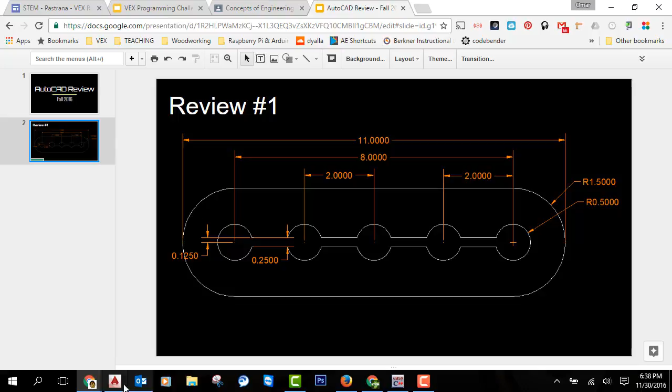One of the things we've got to remember to do is make sure all of these are turned off except for our polar snap, our polar tracking. So we click on that arrow and make sure we've got 15, 30, 45, 60. And then here we have endpoint, midpoint, center, quadrant, intersection. Those are the only ones we have checked on.

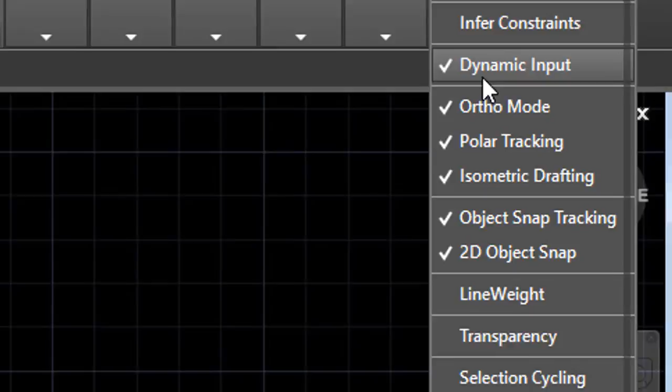If you've got something weird coming on, you've probably got what's called dynamic input. If you click on that, you'll see this one right here, and this is going to be the one you'll probably have, so just make sure that's turned off. Everything else we've got turned off except for those 3, and I just leave that one on.

So I'm going to go ahead and start drawing. When I approach this drawing, I'm thinking of drawing the outside first, and then I'm going to do the inside. So I'm going to go ahead and click circle, click that starting point, and that radius is 1.5.

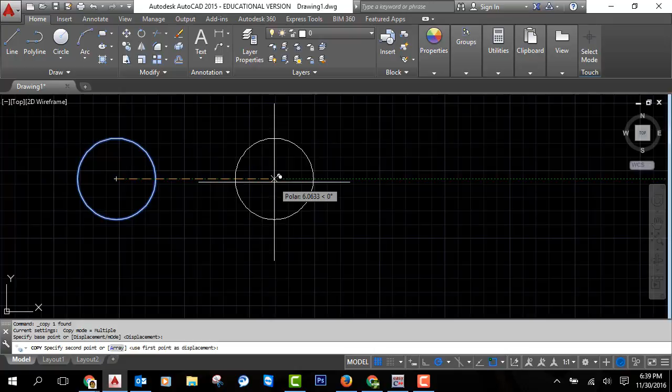So I've made this one, and then I'm going to take this one and copy it. Starting from the center, I'm going to go over to the side, and it says from center to center is 8 inches, so I'm just going to type in 8. And there it is, so now I've got that.

I'm going to make lines, and because I have snap on, I can go quadrant to quadrant, and quadrant to quadrant. And then I do trim - remember trim, I'm going to go ahead and press enter, and then I delete those. And now I have that outside.

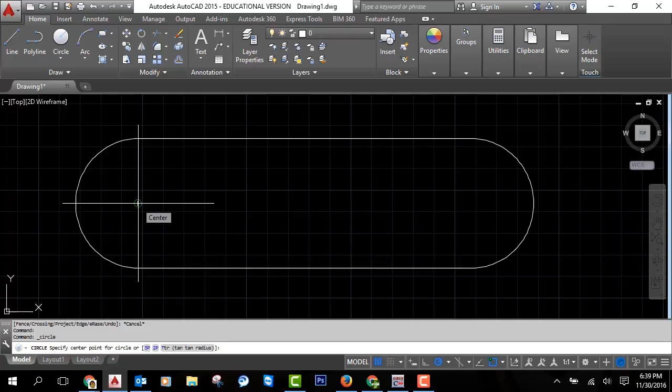I'm going to draw this next circle from the center here, so I can just hover over and find it. I click, and the radius is 0.5, so I type in 0.5.

Copy this one, and I'm going to copy this 4 times. So I'm just going to start from the center here and go over 2 inches to the first one next to it, and then another 2, which is going to be 2 plus 2 is 4. 4 plus 2 is 6, and the last one, 8.

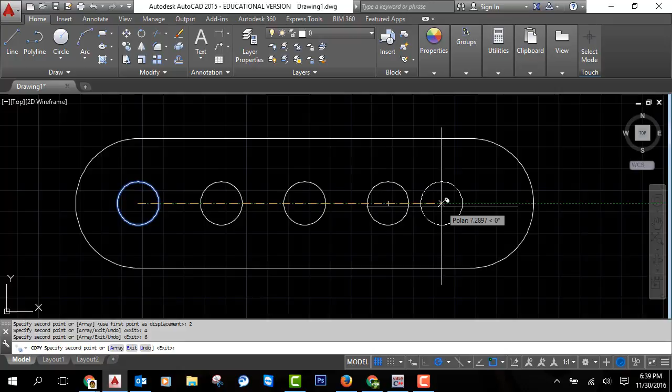All right, so we've got all sorts of those there laid out. I'm going to click on the line and draw a line from the center to the center. And I'm going to take this line - you can see kind of where it says 0.125.

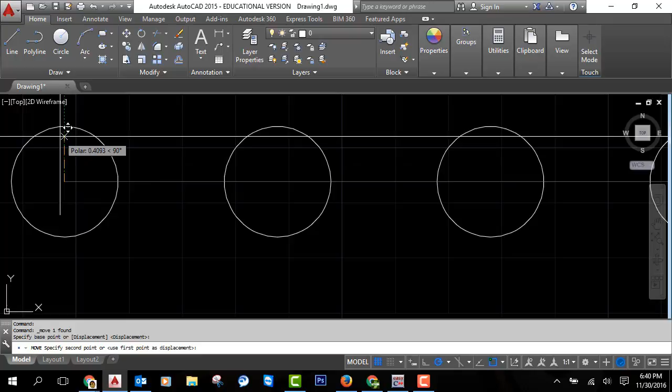I'm going to take this line and move it up. Just going to pick it from the corner, move it up, point in the up direction, 0.1250, press enter. So that's the top part, and then I'm going to copy it down like it says 0.25.

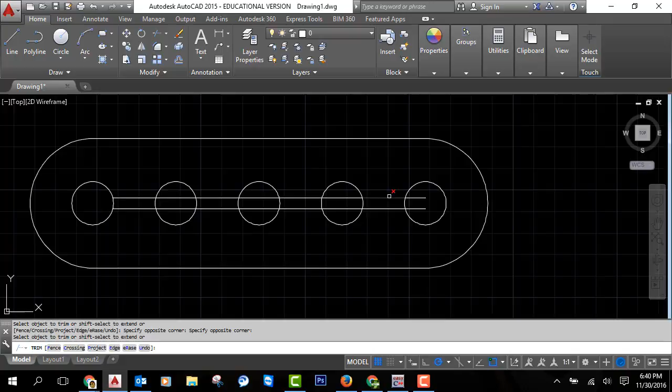So I've got the top and the bottom now, and all I've got to do is trim. So press trim and press enter, that way I can have no boundaries and I can just delete whatever I need to delete. And go all the way across, delete those, those, and these. And that's it, I'm done with the drawing.

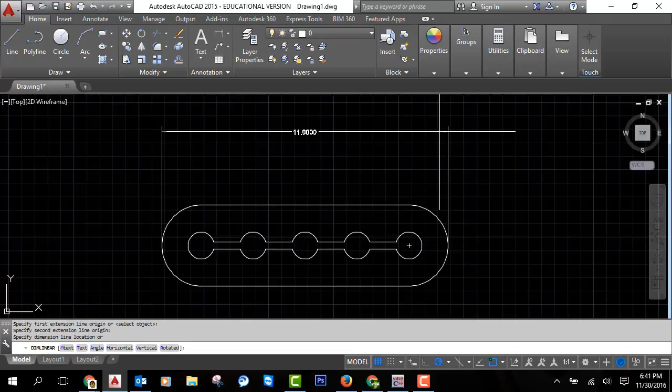All I've got to do is dimension. What's great is I can go ahead and dimension these. Click, click. Boom, go there, center to center.

I'm putting these exact same ones that they have on here already. I'll just snap that to that one to make it look good. And then I need from the center here to this one - you can see I've got to go from the center to here. I come over to the side, and I can get my number that I need.

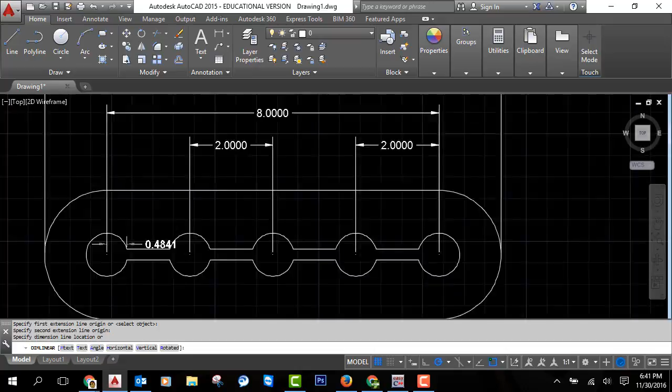And then again, there's that. And then 2 radiuses - the radius of this one, and the radius of this one.

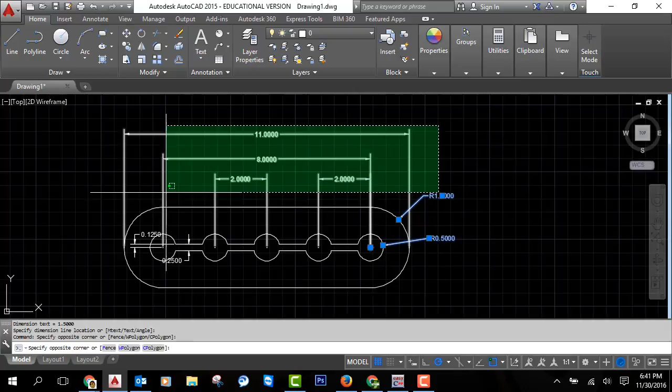I'm going to select all of those, click and click. Over here to properties, and instead of by layer, I'm actually going to select, and I'm just going to pick orange - you can see the last number there is 30, and that's just the one that I use. And so there we go, press escape and done. That is it for review number 1.